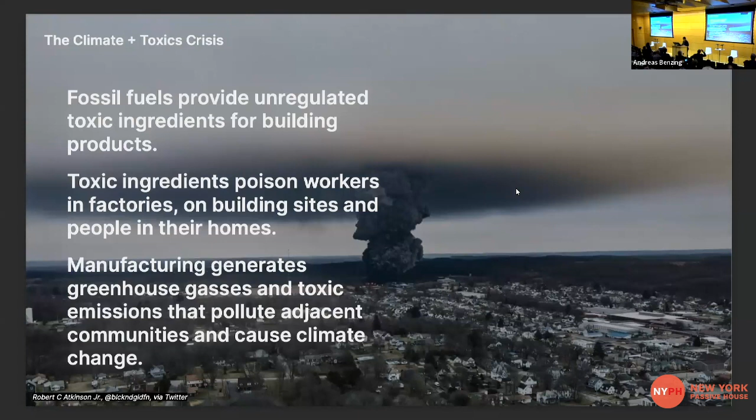Fossil fuel refining products produce both the toxic ingredients for the products we use and the toxic emissions that pollute our planet and ourselves in all our buildings. We know that manufacturing generates greenhouse gases and pollution. We need to change the way we use fossil fuels to make a truly just transition for everyone to green economies.

At HML, we address the toxics and climate issue by charting pathways to make it easier for all of us to design and build healthy buildings today, and to accelerate that rate of change.

Our work begins with common building materials that often contain toxic chemicals. Many people are unaware of this issue. When we specify products as architects and designers, those choices can include chemicals like flame retardants, fluorinated stain treatments, formaldehyde, a range of plastics, and other problematic chemicals. As these chemicals break down, nothing is stable, and chemicals can be released and harm those living in the space.

We do know what's inside food products because ingredients are regulated by the Food and Drug Administration, and many people look at those ingredients, particularly if they eat Doritos. We assume materials and products we buy are regulated, but surprisingly there are no regulations for building products. Many people don't know to ask for product ingredients. Surprising, food and buildings are very similar.

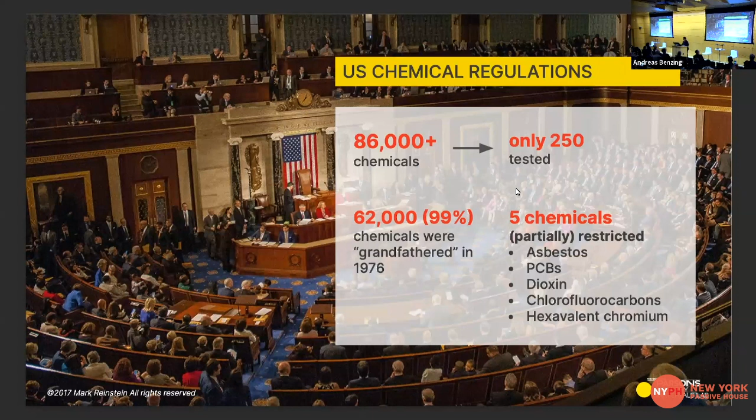We assume that materials in the products we buy have been tested for safety, but most, if not almost all, the chemicals commonly used in building and consumer products in the United States are not regulated for their impact on human health or the environment. Only 250 of the more than 86,000 chemicals currently in use are tested, and only 5 of those, which we all recognize as problematic, have been partially restricted by law. These chemicals have a profound and negative impact on both human health and the planet. The materials used in buildings, cities, objects, and furniture are releasing toxic particles that are absorbed into all our bodies. We are truly, if we are what we eat, we are where we live.

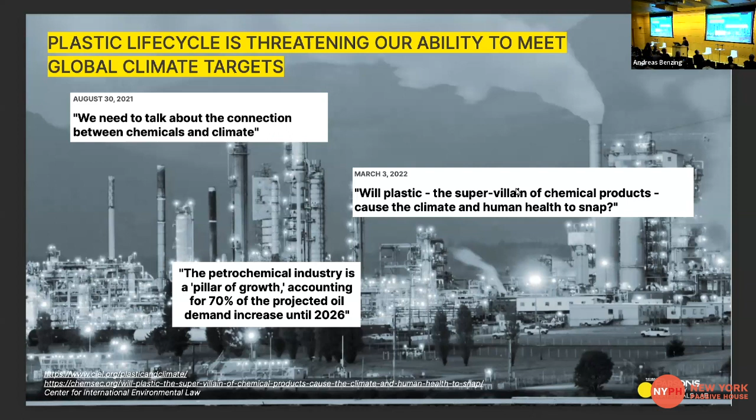Research shows that the petrochemicals used to make building materials have a high carbon footprint. Fossil fuels are used to power the factories, to make the ingredients, and to transport the products and raw materials.

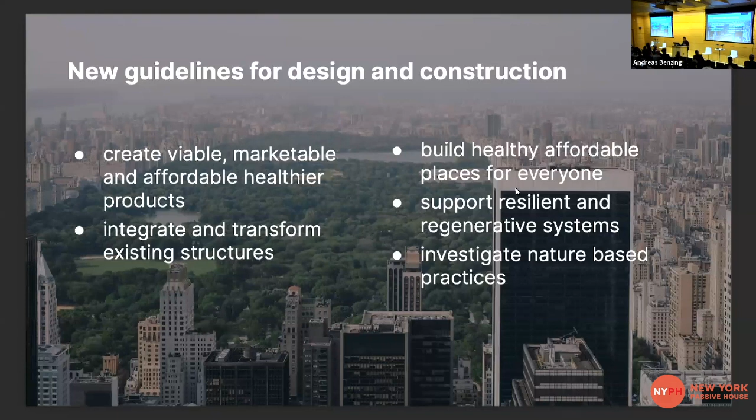We need a new set of guidelines, policies, and regulations to help us make transitions to building better. We can build for a new future if we create viable, marketable products that are affordable, if we integrate and transform existing structures, if we build healthy, affordable places for everyone, if we support resilient and regenerative systems, and if we design with new nature-based practices.

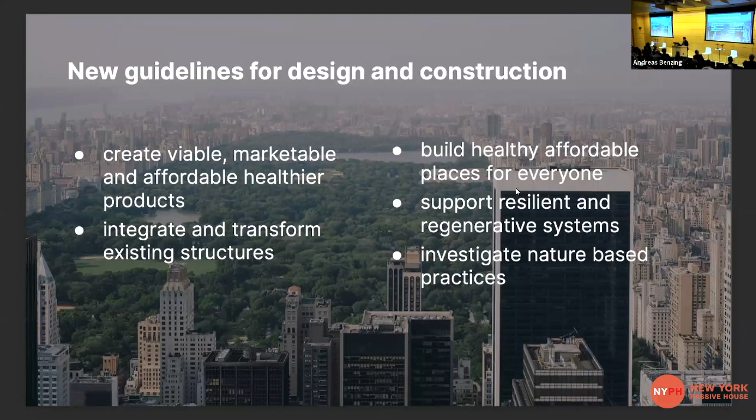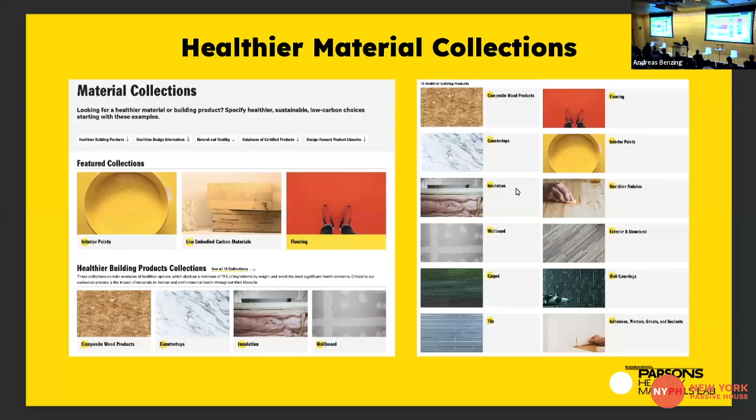Our theory of change is to empower and enable architects and designers to make change today. We offer a wide range of resources to make this possible, including a range of educational programming. On HML's website, we provide free access to carefully vetted collections of healthier materials and offer physical material examples in our New York City library on campus, and we share material health information widely. If you're interested, sign up to learn more about our public events in person and online.

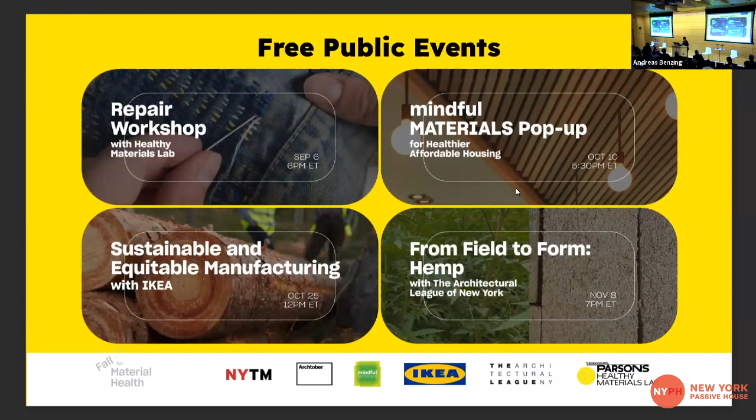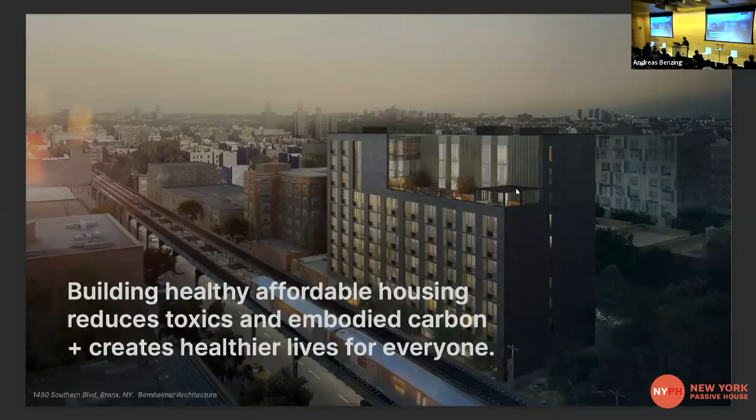As you move through the presentations this afternoon, you'll see a whole range of responses to these questions that I've just posed and that David has highlighted. We ask that you remember that toxic pollution in all its forms is a persistent problem. It's evident that there's a clear relationship between toxic chemicals and embodied carbon content. No one would want to design a high-performance, energy-efficient building that was built with toxic materials. It is possible to build better and reduce both toxic and carbon emissions. This is better for all of us and better for the planet. I'm looking forward to this afternoon's presentations, and I'm inspired by the work of this community.

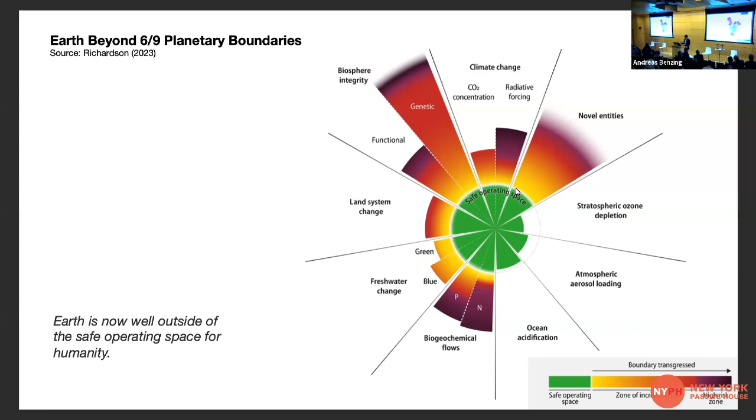Climate Week is traditionally also a moment where many reports are being published. I haven't had the chance to go through most of them yet. This is just one of them, one of these new reports that came out three days ago, about the fact that we're now measuring all nine of the planetary boundaries, and we're actually exceeding six of these nine. So it's a dire moment in time, summarized in this paper by: Earth is now well outside of the safe operating space for humanity.

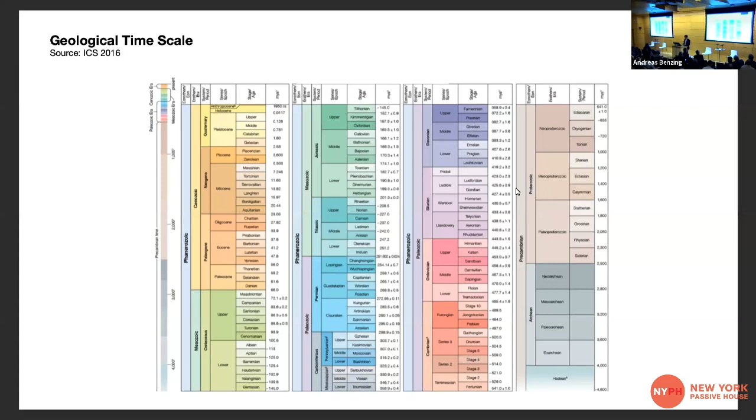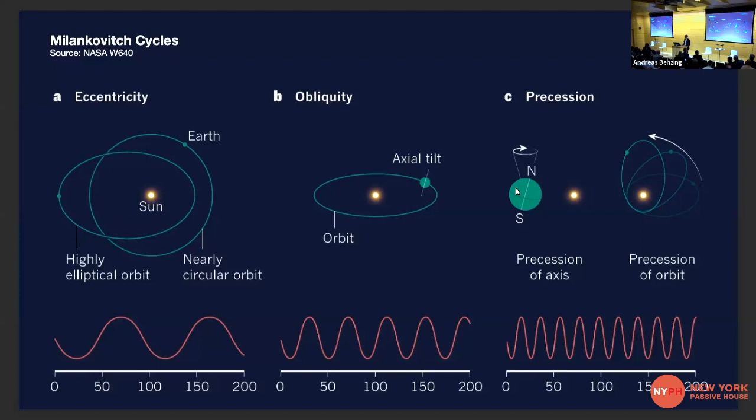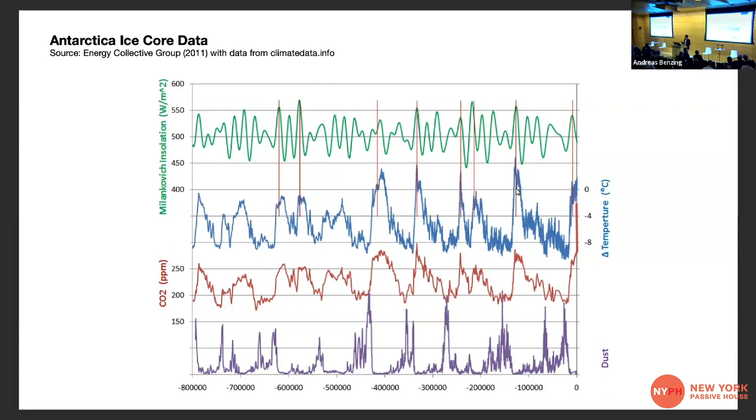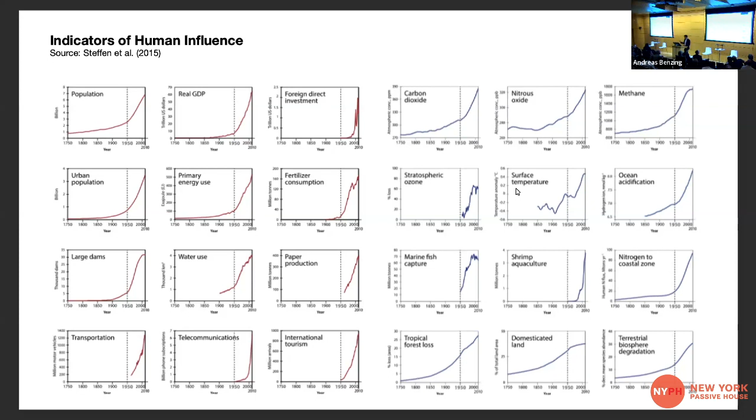Now come the last 70 years, where we see indicators of human influence, and these are all eerily similar. They all start picking up in the 1950s, they all go exponentially up. Some fortunately have slowed down, some are still on the rise, but it doesn't really matter what we're looking at: dam construction, water use, GDP growth, population growth - all of these graphs are similar. This is the reason why we're now talking about the Anthropocene, where human influence took over planetary scales. I think it's important for us to understand that scale.

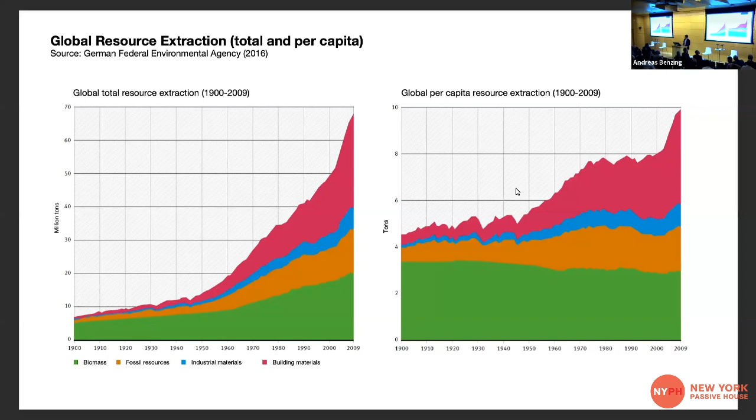Then the question is, what does all of that have to do with the built environment? So here are two more of these graphs that again look the same: in the '50s, we start rising exponentially. Here you can see, in magenta, material - building material extraction on the left, globally, total extraction, and on the right per capita, so that we can't say, well, there are more people on the planet, of course we need more materials. No - every one of us is needing more material, and we're all part of this that's happening.

And so if we sum that all up, estimates say that the built environment, if you take a building from the very beginning till the very end of the building's lifetime, is responsible for more than 50% of materials taken out of the Earth's crust, more than 40% of solid waste that is being produced, and about 40% of the carbon emissions that are being emitted.

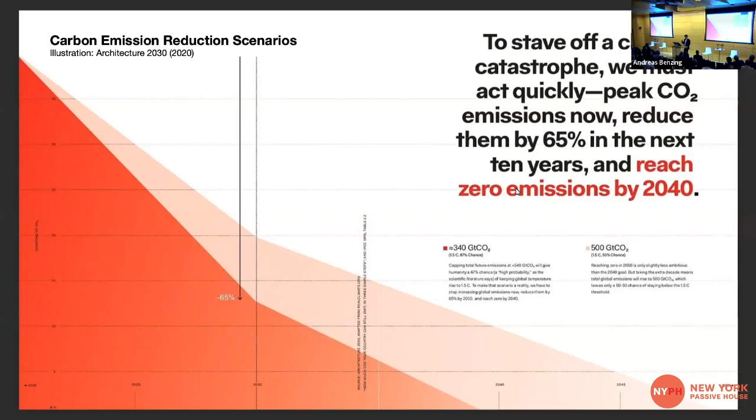The unfortunate news is that, at least in Germany, we have just announced that this year, because of that record summer we've had, we actually reached the 1.5 degree mark already. This hasn't really been discussed in US news yet, and I don't know where we are exactly, but we're damn close to this. So we need rapid action.

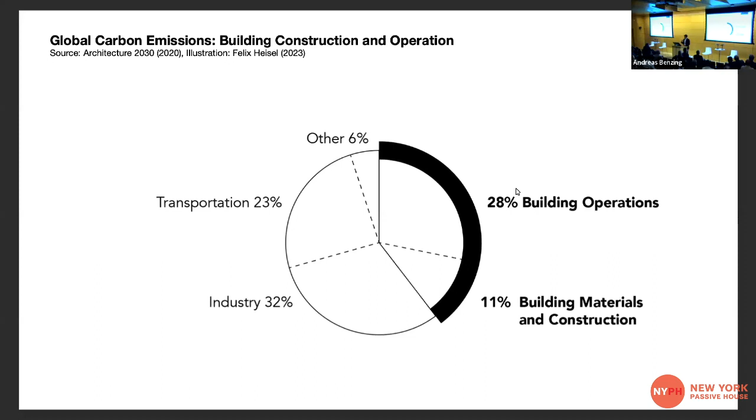And this is where it gets interesting in terms of the relationship between embodied and operational carbon. So what you see here is this 39% that I'm sure all of you have seen before. This is a global number representing the relationship between emissions from building operation and construction of buildings. But if you take one building, construct it today, and think about the timeline—these 7 years or 5 years I just mentioned—these ratios shift dramatically.

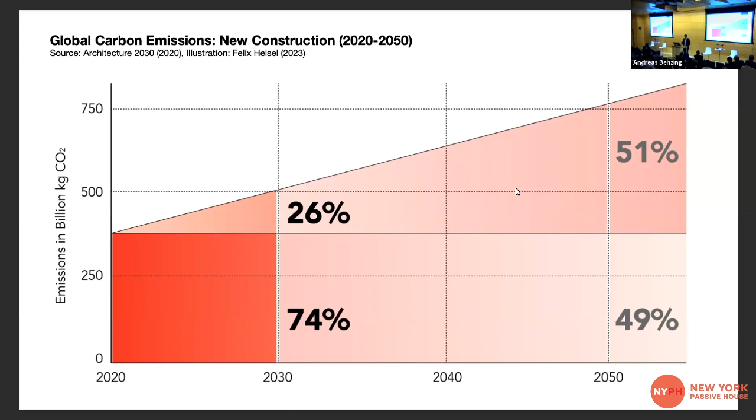Because, of course, embodied carbon emissions are emitted on day one of a building's opening, right? All these emissions have been emitted, versus operational carbon emissions which are emitted little by little over the next 50 years in this scenario. And so if we only have 7 years, then suddenly the way we build becomes really interesting as a starting point for the conversation.

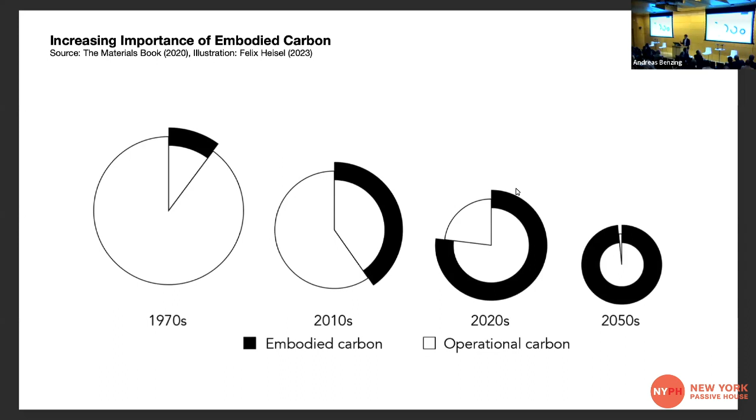Additionally to that, and you're all experts of that, our buildings are getting better and better in terms of the percentage between embodied carbon and operational carbon. So the more passive a house, the more important the way we build it.

And then the question is, what do we do with that now, right? So we know that different materials have different embodied carbon emissions attached to them, but maybe more important is that strategy...

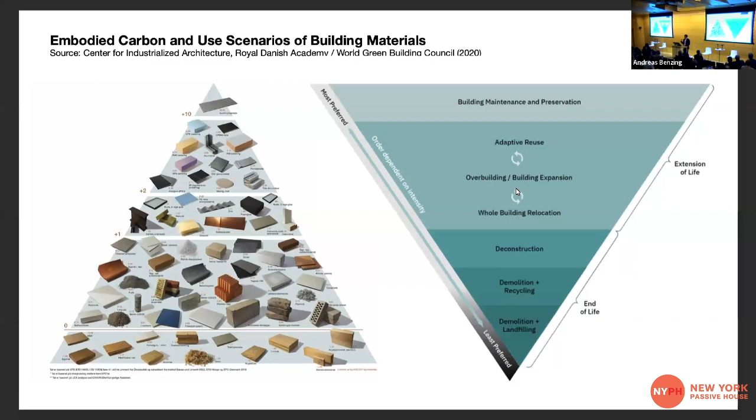...pyramid on the right, where a material that is already here, right? And we start reusing that as a strategy—that has the least emissions attached to it, because these emissions have already been emitted and we're starting to preserve those. And so adaptive reuse, building preservation, reuse, and deconstruction are strategies that we're really interested in.

And so the Circular Construction Lab really focuses on this shift from a linear economy to a circular economy, where we shift from take, make, throw to take, make, repeat, with two different focus points.

One is looking into the past, trying to understand the built environment as a resource for future construction, trying to figure out what we need to know about the built environment to actually activate it as a resource, because we usually don't even know what is in our buildings.

What kind of strategies of extraction can we implement? What kind of economic business models are attached to that? What kind of social constructs are attached to that?

And on the other hand, looking forward, it's the question: how do we now, knowing all of this, design differently so that buildings built today don't run into the same problems in 30, 50, 70, hopefully 500 years down the road when they get to the end of their use time?

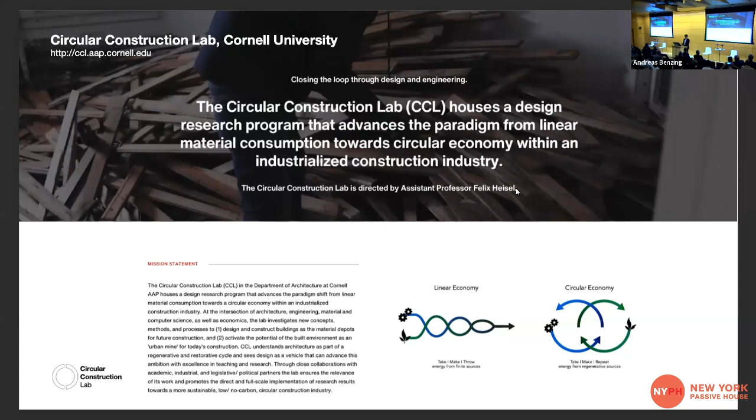And just because sometimes we're asked, so what is a circular economy? The definition we're using is one published by the Ellen MacArthur Foundation and repeatedly overhauled over the last years. A circular economy is one that aims to eliminate waste and pollution, circulate products and materials at the highest utility and value, and regenerate nature.

So the projects that I want to show address these two directions that I just mentioned. I'm going to start with the question: what do we do with the built environment as it is, and how can we see that as a resource?

This is a pavilion that we built for the Ministry of Environment in Germany in 2019. It's called the Mehrwert Pavilion, and it's a structure that is entirely built of secondary materials, so there's no virgin resources in this construction. I'm pointing it out mainly because of the story with the reuse of steel, but we've had 4 different material families in this building.

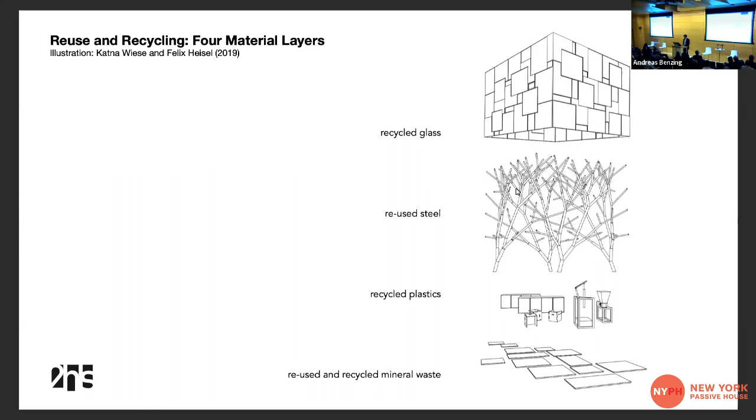The facade is basically only recycled glass. Then we have all the furniture that is recycled plastics, actually recycled household plastics in this case. And then we have reused and recycled mineral waste for all the flooring and the foundation.

This is an image of these foundations. That white snow-like material is ceramic waste that otherwise would have been landfilled, and we found a way to define the sieve curve through milling it into very different particle sizes to form, without any adhesive, a layer that sustains 6 million visitors over 3-4 months. We kept this material out of the landfill, we didn't add anything to it, and we created a wonderful aesthetic because it sparkles in the sun like snow.

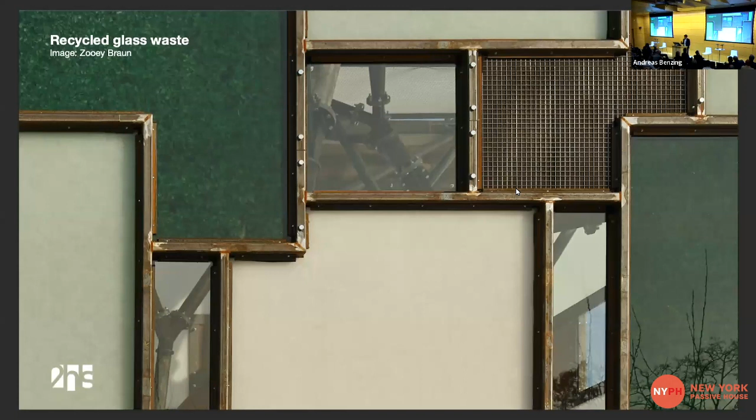It was incredibly beautiful. The facade uses secondary glass resources, but brought into a ceramic product, a glass ceramic product. The interesting thing is that it keeps the aesthetic of the shard, right? We're not melting this material all the way to the melting point, but it's just soft enough to create a new product out of it. So we're using less energy, but we're also keeping that shard, which gives an aesthetic you could never generate from a virgin resource, and really talks about the history of the material.

But what I wanted to mention most about this project is the reuse of steel. We can always recycle steel, but what we wanted to do here is reuse it directly.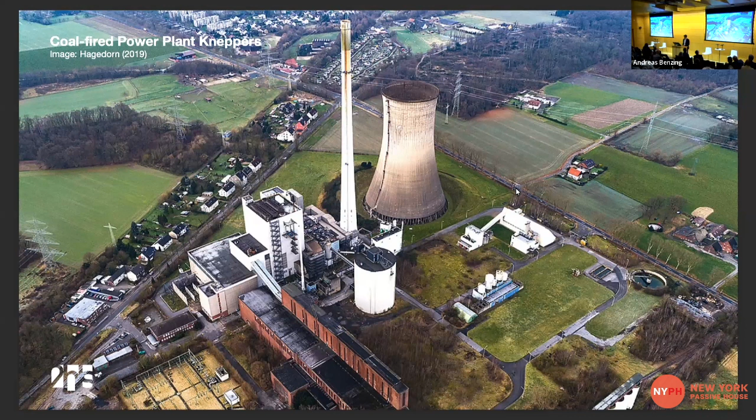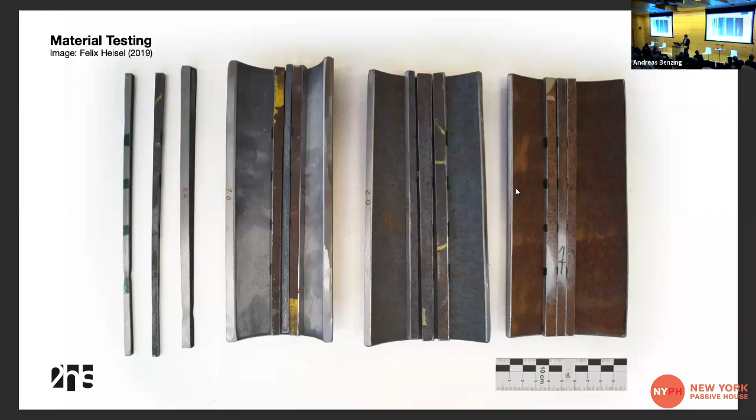But we were able to take the steel we needed for this building out of this power plant before they blew it up. The problem was we had no idea what steel we got, because there was no documentation, it was not stamped. So the office needed to go out and do 5 tests at a large sample size: chemical composition, weldability, tensile test, compression test, to figure out that, yes, this is standard structural steel. With that knowledge and that stamp, we were then able to get a building permit for this.

The reason why this is important, I think we'll get back to at a later stage of this talk. The documentation of our built environment is an increasingly important part in the transition to the circular economy.

The point I wanted to make with this image is that, of course, there's a design conversation here as well, because we started with a building stock that is non-uniform, that would have never resulted in an image like this if we had started with standard steel from, I don't know, a department store. So the dimensions, the sizes, the condition, the marks, the historic marks, determined the design process of this pavilion.

Now, this is one example from Germany. If we want to scale this and translate that into a US context, this next project is a deconstruction project in Ithaca, New York.

Here we had a developer that got a permit to take down 11 residential houses from 1906. You see that process: the excavator driving through those houses. Essentially, it takes 2 days to take down that house. Everything is driven over, made as small as possible, one stream for recycling, everything put into a dumpster and shipped off to the landfill.

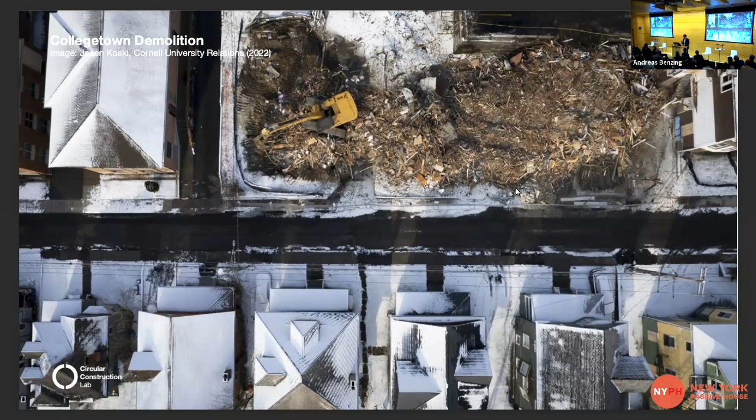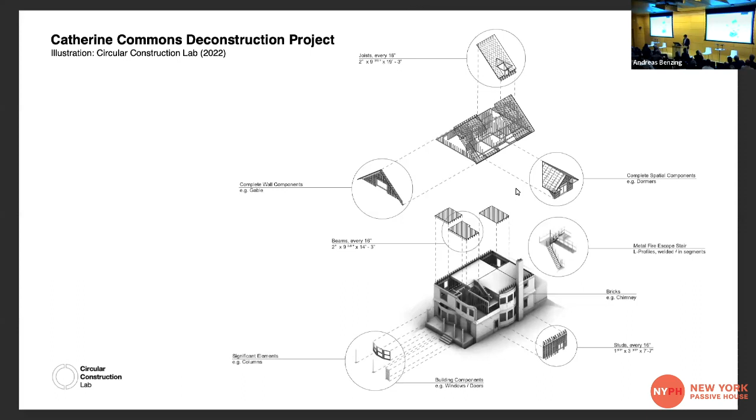Which was a challenge, because a deconstruction is more expensive and more time-intensive than a demolition. So what we needed to do was develop a new process of deconstruction, which we're calling panelized deconstruction. We worked together with the Building Deconstruction Institute out of Seattle.

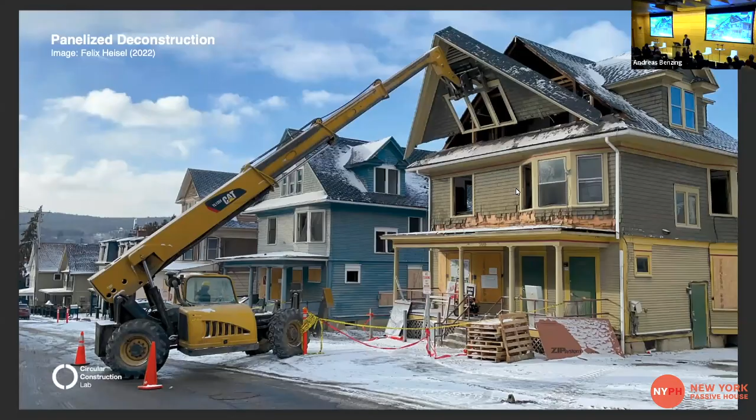Essentially the idea is to cut a building into pieces that are as large as possible so that they still fit on a flatbed truck, to be shipped away from the site as quickly as possible, and to do the time-intensive deconstruction of these units or components in a controlled environment in a warehouse at a different location, which meant that in this case, after 4.5 days, we had the site cleared.

It was a 3-story, 13-bedroom residential unit, which took us 4.5 days to deconstruct. We had a very happy client because we were out in time.

And we had a large amount of data that we've been sieving through for a year now, to create a narrative about deconstruction versus demolition. So why are we interested in this?

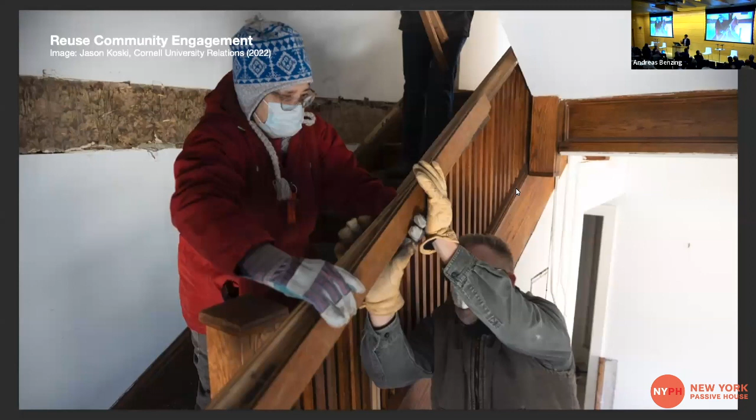One part is that it's an insanely positive community engagement tool. We had the acting mayor of Ithaca carrying out floorboards of these houses to rescue wood from the demolition, which was a really important way to start a political conversation about what we're doing in the built environment.

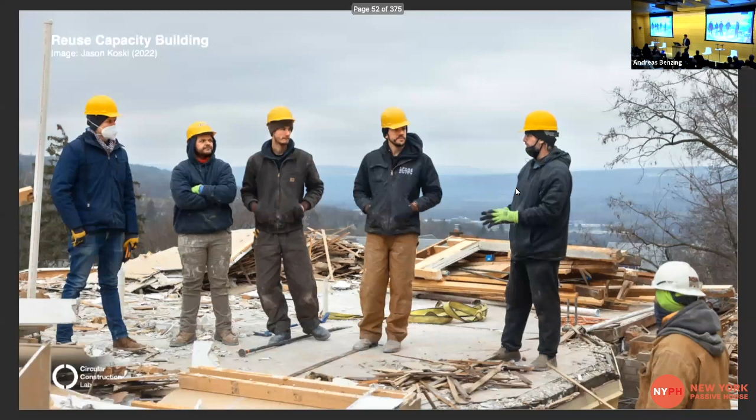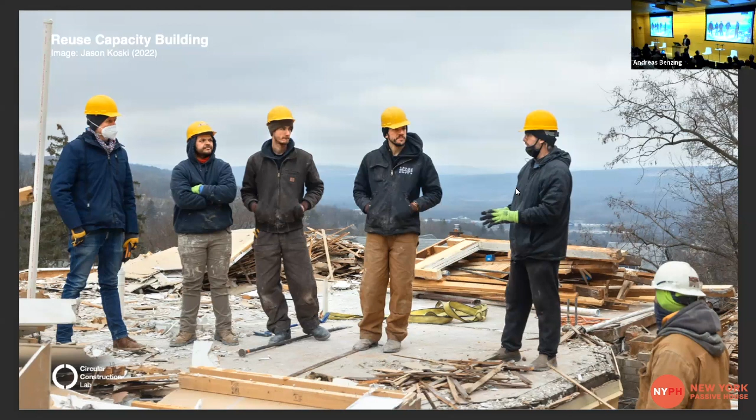We used it as a capacity building program with local trades. In this case, you see Trade Design Build, one of our main contractors, getting training by the Deconstruction Institute to pass this knowledge into the industry.

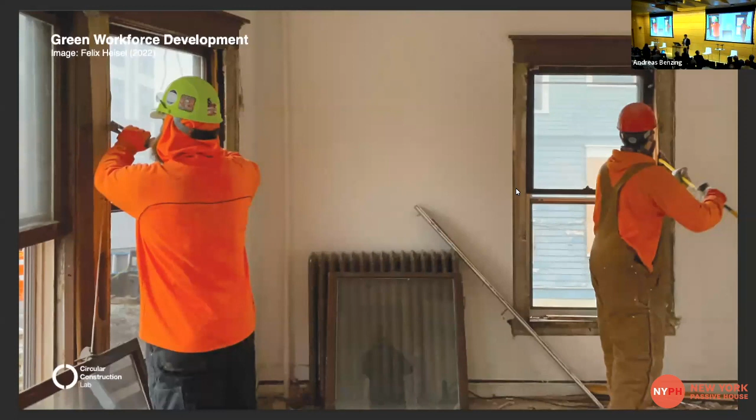We've worked together with the apprenticeship program of the local union to bring apprentices into this program and start training them in deconstruction. And we're bringing in students.

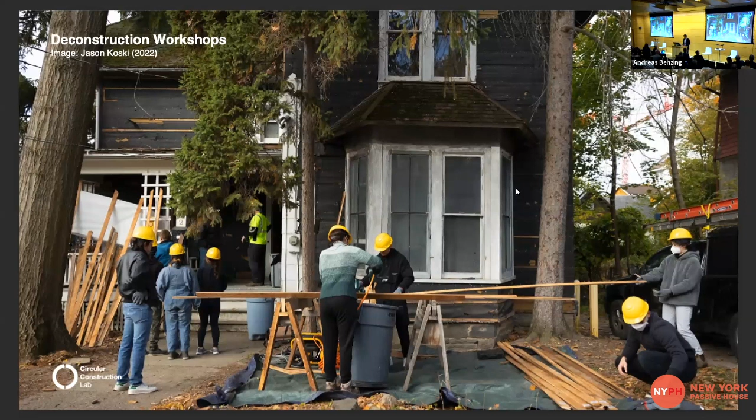This is my design studio class working on denailing and deconstructing timber. It's a really interesting exercise for an architecture student to take down a building, and especially a detail that wasn't meant to be taken apart, because you spend two hours trying to save this timber beam.

And in the end, it might still snap because that last nail just didn't give way, and there's a lot of frustration involved. But the benefit is that when you go back to your drafting table at the end, you're never going to draw a detail like that you tried to deconstruct. You're going to draw something that is reversible, designed for disassembly, because you've experienced with your own hands the frustration of taking something apart that isn't meant to be taken apart.

A bit more scientific is a real analysis of these two case studies. And now we're seeing in the local environment in Ithaca that we're not only much better for the environment, but we're also cost competitive.

Because the revenue that we're getting from the resale of these materials that we took out of the building actually offsets the additional labor costs that we had for deconstructing that building.

And this is really good news, because if we're cost competitive, we can shift the conversation to the things that actually matter: the embodied carbon that we're taking out of the building, the additional labor that we're creating, the green workforce development, the new jobs, the cultural heritage that's being preserved through deconstruction.

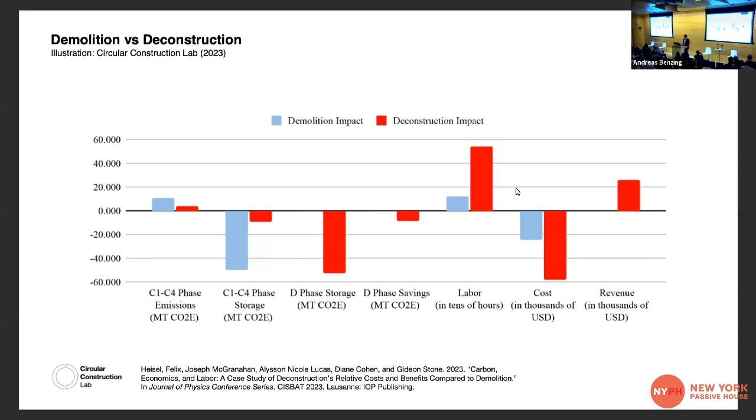The other thing I mentioned at the beginning is we use this project as a starting point to understand what is in a building. What I'm showing here is what we're calling a salvage and deconstruction survey toolkit, which is essentially a set of...

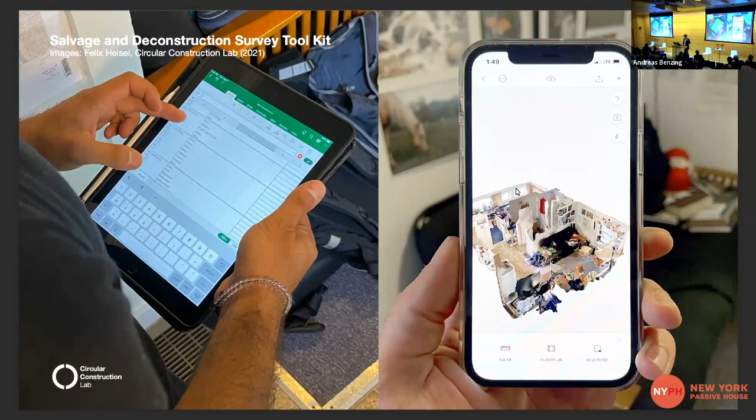Tools that we're developing for scanning the built environment. On the right side, you see a LiDAR scan of a building. On the left side, you see an Excel survey that we've started to create, but we can link these two.

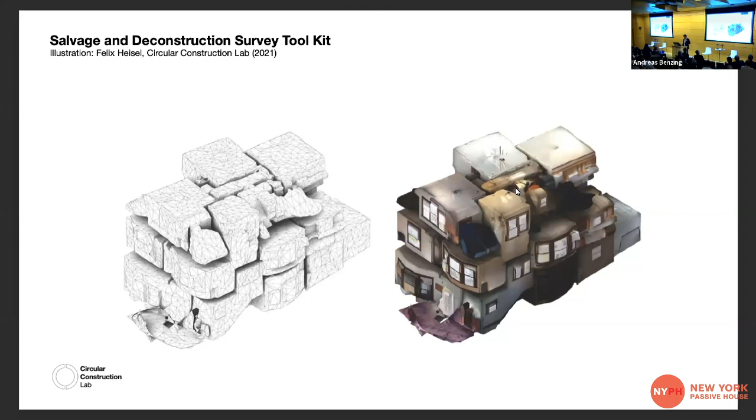Of course that LiDAR scan has the benefit that it has embedded textures and photographs. So when you connect these two components, you get a rather quick estimate of the material contents of a building.

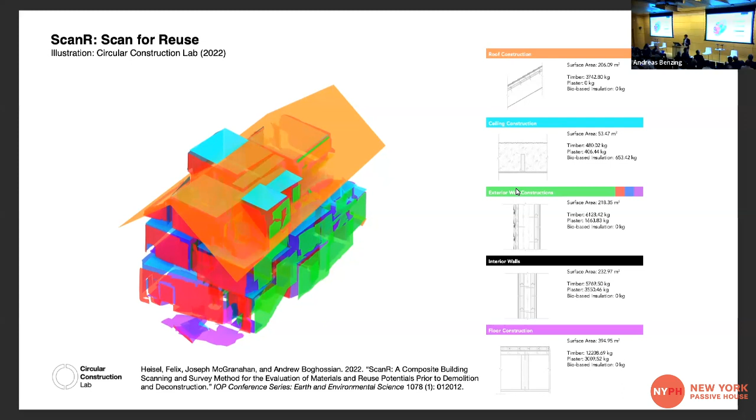It took us two hours to scan this house and a couple hours post-processing, but you then know, as a ballpark figure, what is in the building, what kind of details to expect. We're using construction archetypes linked to these surfaces—not to say you want to sell exactly 3,742 kilograms of timber, but to start a meaningful conversation with a deconstruction expert, with policy on getting a deconstruction permit. All of these numbers help have a more informed conversation with local stakeholders about a specific building and the benefits of saving it.

Here you can see a set of these construction archetypes that were developed. This is of course a local database, and we're really interested in expanding it so that this tool is more accurate in different locations. But this is an ongoing research project.

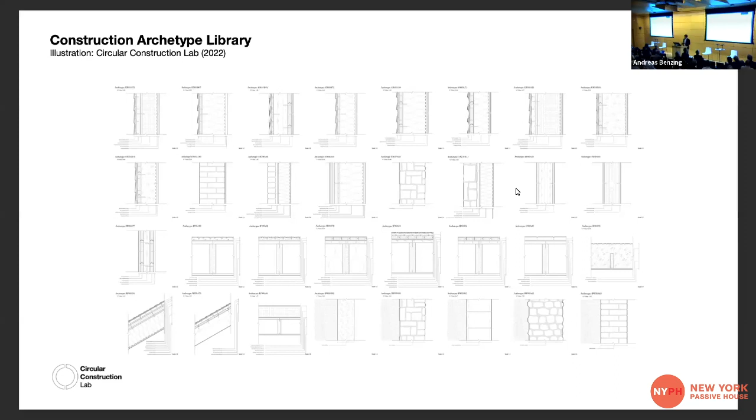Here you can see a quick summary of what is possible to get out of this scan very quickly. One is, of course, an embodied carbon number. You get surface areas, you get different types of material information.

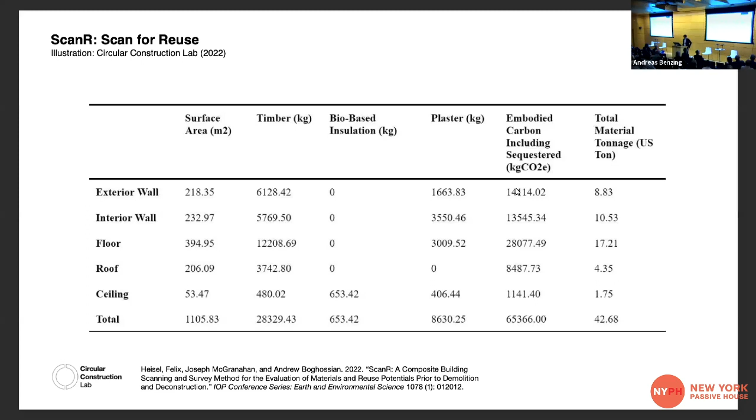We can do this on the building level, but I think it gets really interesting when you get this data on an urban scale, because while we can take materials out of one building to build one more building, it's unlikely that this will ever be a direct move. It's more likely that we'll take materials out of one building and bring that into 10 buildings, and take other 10 buildings and bring material into one. So we're talking about an urban marketplace, an urban stock flow model. And we need a much better understanding of that so-called urban mine.

Ithaca is a fantastic case study for us, because in 2019 the Ithaca Common Council approved what is called the Ithaca Green New Deal, a plan to decarbonize the entire city—all 6,000 buildings—by 2030. It's an incredibly ambitious program, and it's been in the news left and right and everywhere. The main component is complete electrification of the built environment, so every house will be electrified. There will be no fossil fuels in Ithaca by 2030.

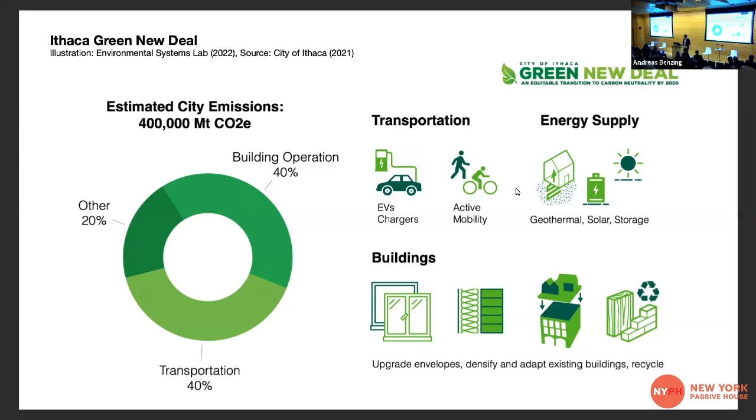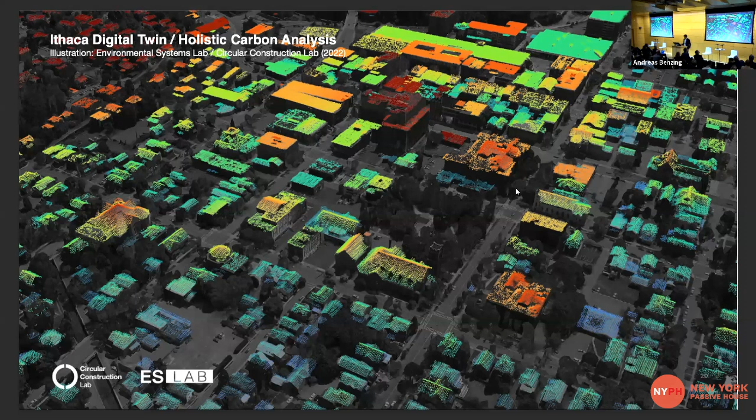But with it comes an interesting conversation about what that means on the embodied carbon side, and that's where we want to be involved. Our solution is the construction of a digital twin of the entire city to then do scenario simulations and trade-off simulations of different strategies in this decarbonization effort—really thinking decarbonization holistically, embodied and operational carbon emissions together. This is a project we're working on together with the Environmental Systems Lab and Professor Timur Dogan at Cornell, but it also has NYSERDA, Siemens, and Avangrid as partners, to really understand these urban scale questions using Ithaca as a case study.

I'm not going to go into all the details of that model, but it's essentially fed by aerial LiDAR data that's publicly available, GIS data and footprint data that's publicly available, and tax information that's publicly available. We use all of this to generate a clean geometry, and we map our construction archetypes to this geometry to generate a model that can do both circularity analysis and EnergyPlus simulation for all 6,000 buildings in Ithaca.

So naturally, we're starting with simple information like what kind of housing types do we have, what kind of heating systems do we have, right? This is something we can map very quickly.

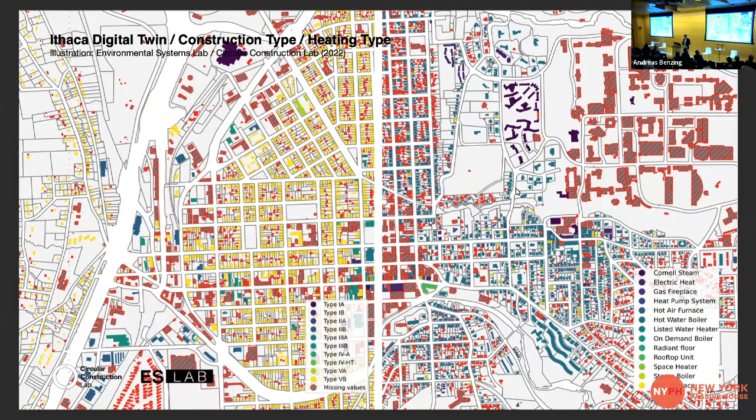When we combine that with, for example, a rooftop PV potential analysis of all these geometries, we're suddenly talking about an urban scale conversation. Can we fulfill all the load demand from electrification of these buildings with local PV potential, based on a geometry analysis of the city? The interesting thing is that if we bring it down through electrification and a meaningful retrofit over the year, we can actually do that on an urban scale. Naturally, in January we have a problem, and in July we have a bit more energy than we need. But as a year budget, on average, we can cover the electricity demand through local generation.

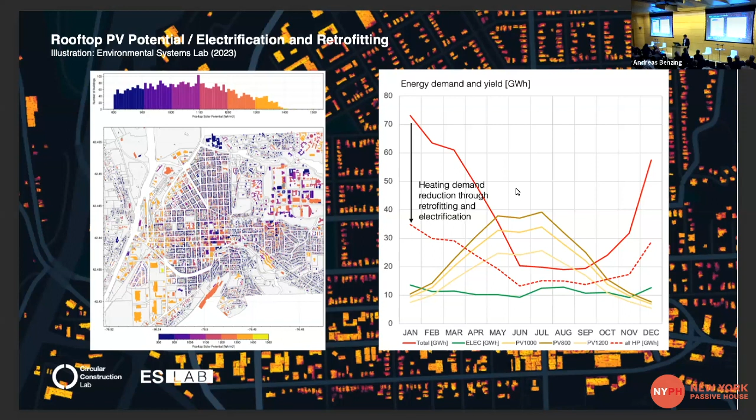Our contribution is really on the detailed understanding of the built environment in terms of materiality. This is a summary of the urban material cadastre of Ithaca - how much timber is in these buildings, which buildings have which intensity of materials, where is what kind of embodied carbon in there.

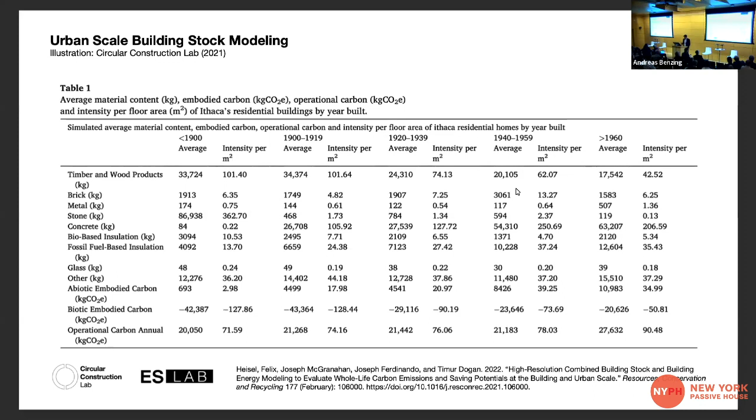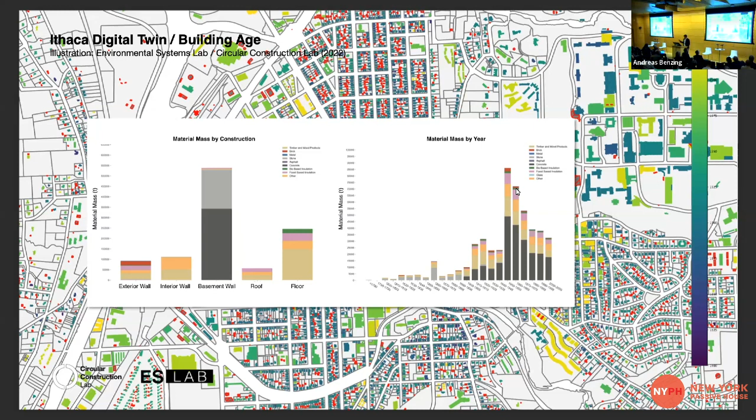When we combine this - these slides were generated yesterday because we finally got it to work just in time to show you - it's an understanding of the circularity of these constructions. We did an EnergyPlus simulation for all these materials and buildings, but now we also did a material passport calculation and a circularity calculation for 6,000 buildings. So now we know not just which materials are where, but what kind of circularity is attached to these buildings.

Unfortunately the scale is hard to read, but we're ranging between 0 and 70% in these buildings. The yellow buildings are extremely circular. The bluish magenta ones are less circular, which doesn't necessarily surprise us, knowing the stock a little bit. This has to do with age and material use in these buildings.

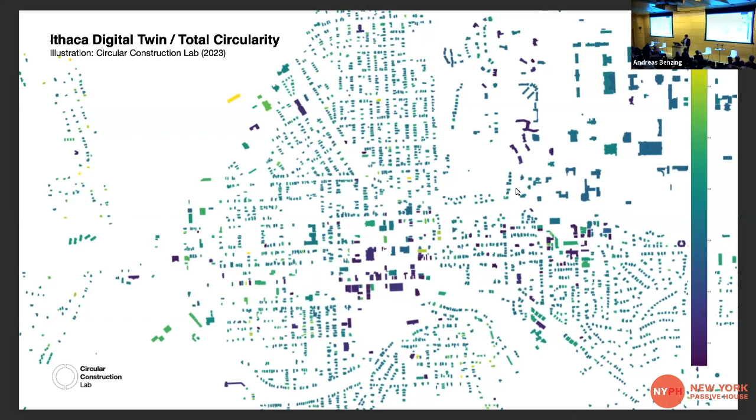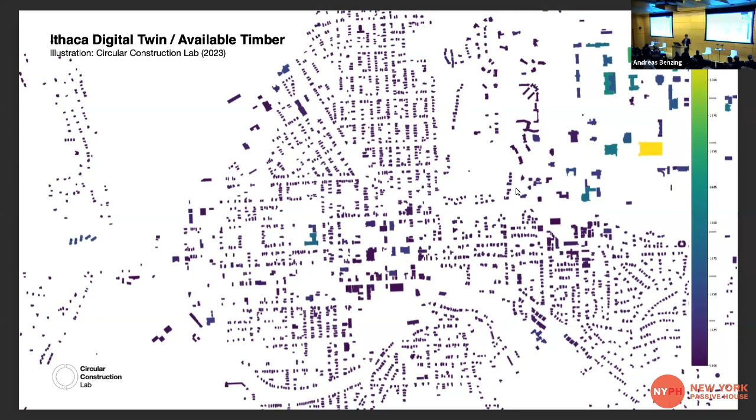The interesting thing is, if you compare these numbers with an understanding of what materials are in these buildings and how they're constructed - in this case we're seeing only timber and the amount of timber in these buildings - if a building comes to market or asks for a demo permit, you can look up: this building has a lot of timber, and it's also easy to get. Or in this case, there's a lot of material here, but it's really hard to get. So we have a much more informed conversation on the urban scale about circularity and materials.

None of this works without policy. So in 2020, we founded a stakeholder network called CROWD, short for Circularity, Reuse, and Zero Waste Development. It's a local, growing stakeholder network for New York State.

We had really interesting partners join recently. For example, the Preservation Association of Central New York is one of the more recent members, but we also have the City of Ithaca, and now the City of Troy, join CROWD.

The agency we're creating with this is really to have a New York State partner that talks about policy in the built environment regarding circularity and deconstruction, and specifically reuse. We've created a platform that's now at the point where we talk to the New York State Assembly, talk to certain senators, and we're talking to 7 different cities and communities about policy changes towards reuse. The outcomes of all of this are publicly available. The most recent publication is a local government policy guide to alternatives to demolition through deconstruction and building material reuse, available on cr0wd.org - crowd with a zero, not an O.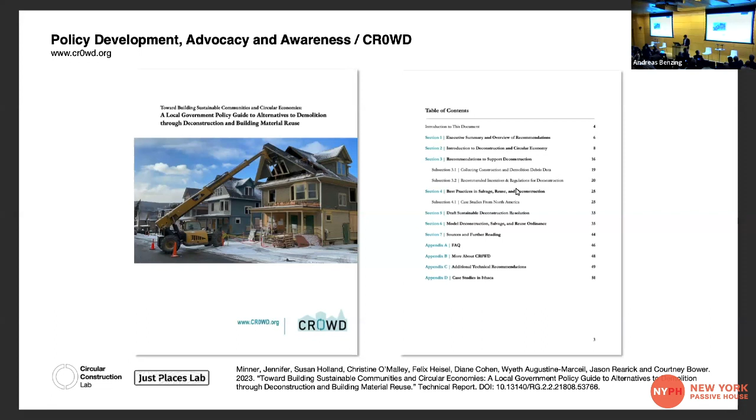Next to policy, we also need to talk about code. One thing with timber, for example, is that at least in New York State you can't just reclaim timber for a structural application - it's not allowed. So we've partnered with SBP out of New York, and are in the midst of a test series that looks at reclaimed timber and the steps we need to update our code to allow structural timber reuse.

That has to do with questions like: how do we even find out what timber that is? How do we classify that timber? What information do we need for a meaningful structural engineering design? And how does that comply with code, and where do we need to make changes to the code?

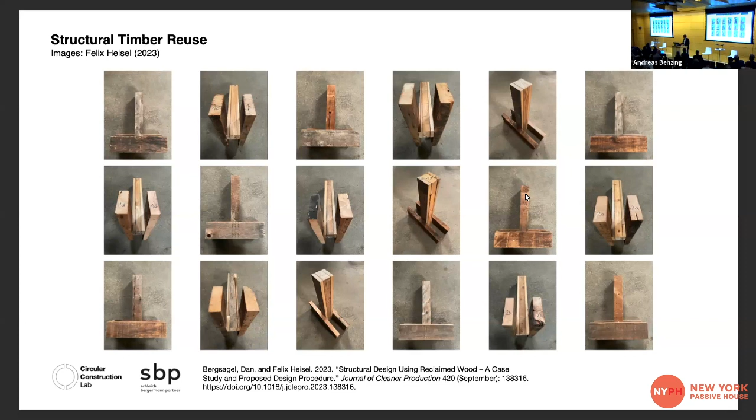The other stream that we're looking at is design for disassembly. So how do we design differently from now on?

The example I want to show is the Urban Mining and Recycling Unit, a building we constructed in Switzerland with the office of Werner Sobek. The building we're looking at is the part in the middle of the screen with the copper frame. It's a unit within the so-called NEST, a shelf-like structure surrounding the Urban Mining Recycling Unit, which is a testing facility of the materials testing laboratories in Switzerland.

They came to us based on a book we published in 2014, Building from Waste, where the question was: it's nice that you're writing about resources out of waste academically, but can you actually prove it? Can you use these materials in the built environment? So we had our work cut out, and it took 4 years to make it possible. The claim was that we built a building where all materials going into it can return to their cycles at 100%, a very academic goal for a built project, maybe only possible in this specific setting where the client gave us the time and money to figure out how this is possible.

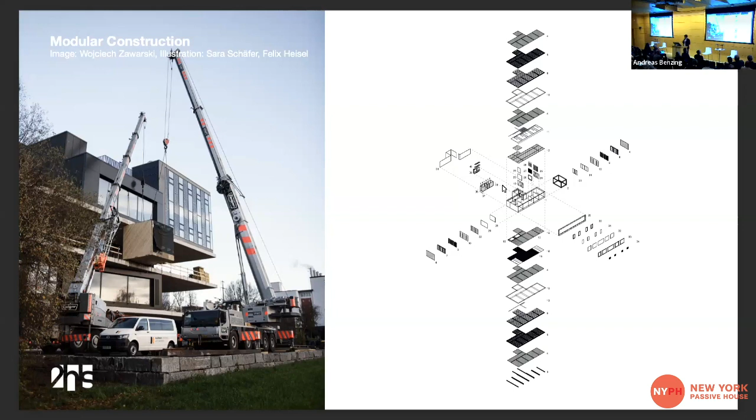Design for disassembly really is the guiding principle, which led in some parts to modular construction. We delivered 7 units that make up the whole unit in one day, rolling them into the building and only pinning them down on rail foundations. The idea is that at end of life, we just roll them back out, bring them to the factory, and disassemble them. Disassembly was always the guiding principle, as you can see in the drawing on the right, making sure every connection is known and every material is separated into different life cycles in different locations.

I want to show a couple of examples. How am I doing on time here?

One question we asked ourselves is, can you build a brick wall without mortar? Mortar is usually the issue when you want to directly reuse the brick. So this is our answer: we developed a new brick with a tongue and groove system and a post-tensioning cable system, creating a structurally stable wall by tensioning these rods. If you want to reuse the brick, you unscrew the steel connection, take out the brick, and you can use it somewhere else, reshuffle the wall, and do all sorts of things with it.

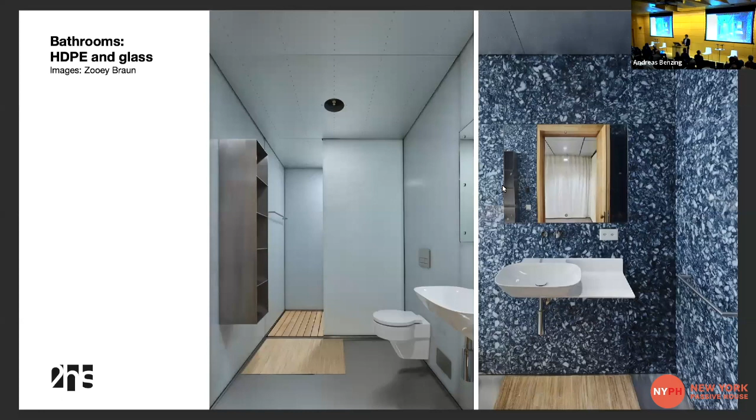The other question was, how can we build without any adhesives? There's not a single type of adhesive in the building—no silicone, no glues. It becomes especially interesting in wet rooms like bathrooms or restrooms. The example here shows the two bathrooms the unit has, where we opted for the largest format of glass or HDPE panels pressed into dry gasket sealants. If we wanted to take these out, it's just two screw connections and you can remove the whole panel—no silicone left on it, nothing to scrape. These are basically as delivered from the manufacturer, and you can take them out and reuse them somewhere else. The building has been standing since 2018 without any water leakage or damage, so it's possible to build without adhesives.

Another question we ran into, to show the level of detail needed to get these last couple of percentage points out of a building, is that we didn't find a single faucet on the market that fulfilled our goal of recyclability or reusability, because they're usually 3 different materials pressure-fit together—copper pipe in the middle, some movable parts out of plastic, some surface material around it—and they're not meant for disassembly.

And so usually these things end up in the landfill. And at the end, we decided we need to partner with someone and actually develop our own faucets. So the faucets in this unit are 3D printed stainless steel, where all parts—the pipe, the movable element, and the faucet itself—are printed in one go and in one material. So it's a monomaterial solution.

And if you can't reuse it for the tenth time anymore, which is, of course, the hope that you first do that, then you can reprint something else out of that material without any loss.

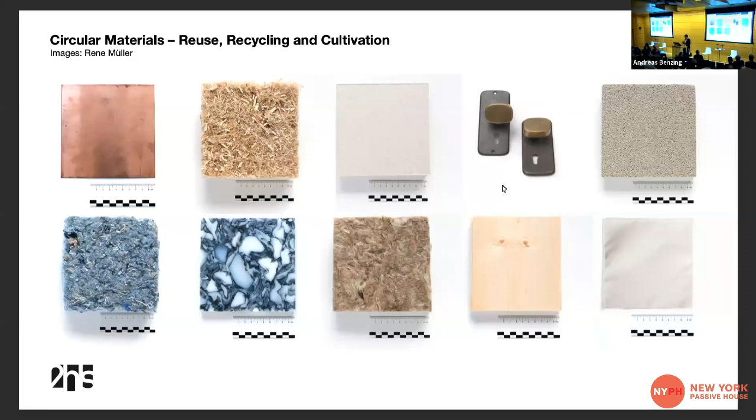Documentation is key. So that unit has its own material library with all the 24 materials that were used, available online, and also as a physical sample in the unit to sort of store that memory.

And in the end, we used the unit to create a material passport. At that time, Madaster was the leading agency that allowed us to do that. By now we have a couple more, but Madaster is still the leading agency in Europe, at least.

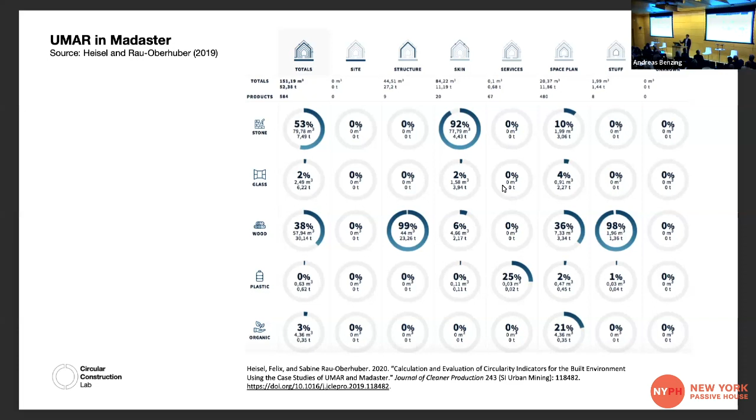Madaster is short for Material Cadastre. And it allows us to know which material is where in the building, how it's connected, what dimensions we have—so basically to foresee a future deconstruction, assuming we're not part of it, and how much information we need to pass on to someone else who wants to reuse these materials in their own buildings.

Going back, one more project from Ithaca with the same intention behind it. The wood that we took out of the deconstruction project shown earlier, part of this was used as a student project in a design-for-reuse studio. The idea was to build a structure on the art quad for the Cornell Biennial that is built entirely out of reused materials and designed for disassembly.

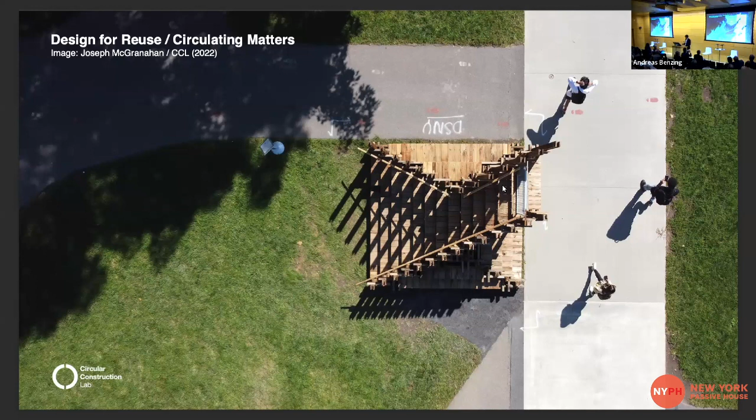So the result of that is called Circulating Matters. It's a curious little staircase that deals with multiple types of circulation—of materials, of humans—but it's large enough to need a building permit. So we needed to go through the whole process with the city of Ithaca on structural timber reuse and how we would need to permit that.

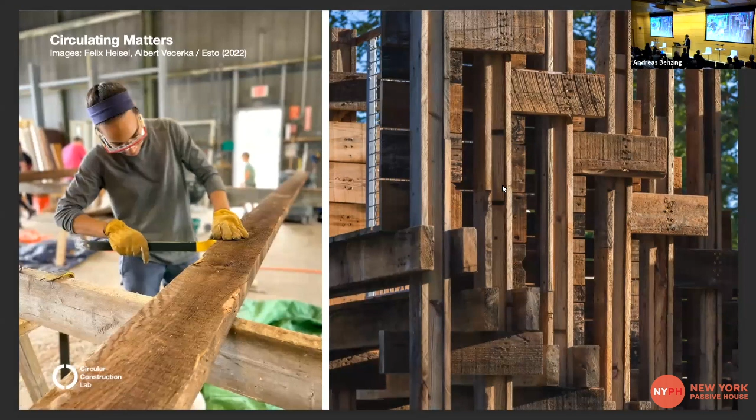So this is the first structural timber reuse in Ithaca that has a building permit, and it creates a bit of a precedent, but for us it more creates an understanding of the steps it takes for a process like that. And of course, it deals with many qualities, the aesthetics that come with material reuse.

The play between the old and the new, or the cut and the surfaces of the old. It teaches students how to deal with these materials. But more importantly, it asks a question similar to the Mehrwert Pavilion: how do we design with a non-standardized stock?

And so the details that we needed to develop had to deal with a tolerance of almost half an inch, because these materials were, of course, partially hand-cut or pre-industrialist cut—120 years old, these beams that we took out of this building.

So we couldn't really have a standard connection detail because the tolerances were way too big. And that's where, in the end, the design of these beams that shoot past each other started—because that way you only need one surface that is your defining dimension, and everything else is free and can play with that.

On the left side, you see a system to start material passporting and documenting these materials, making the connection between the physical and the digital to figure out where this was in the building before, where it is now, and where it can go next.

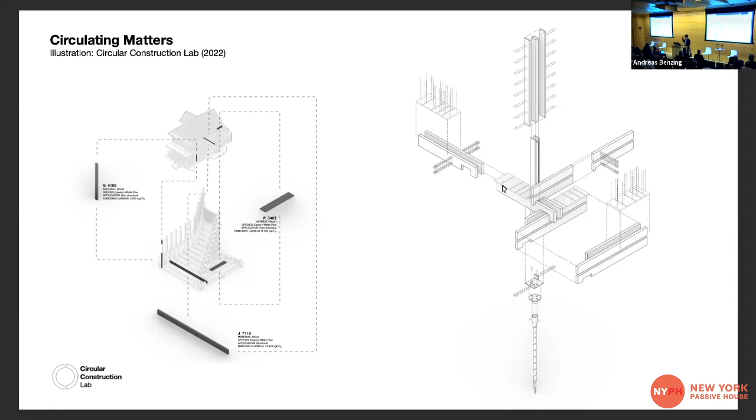And the next in this case is now an installation at Art Omi. We just moved this structure a month ago into the Architecture and Sculpture Park near Ghent, here in upstate New York. So if you ever have the chance to visit this fantastic park, maybe stop by this structure—it's going to be there for the next couple of years.

And it was a really interesting exercise, because for a new location, of course, we wanted to update the design. We wanted to reshuffle the design slightly to talk about the new site conditions, and the design for disassembly really allowed for that. We were able to reuse all of the materials.

I want to finish with a little software application we're working on, driven by an understanding derived from the Urban Mining and Recycling Unit. I showed you this material passport, and we were always annoyed with ourselves that we did that way too late. We first built the building, we designed the building, and in the end we had a nice BIM model. The BIM model gave us all the information needed to calculate the circularity of the material and publish this material report.

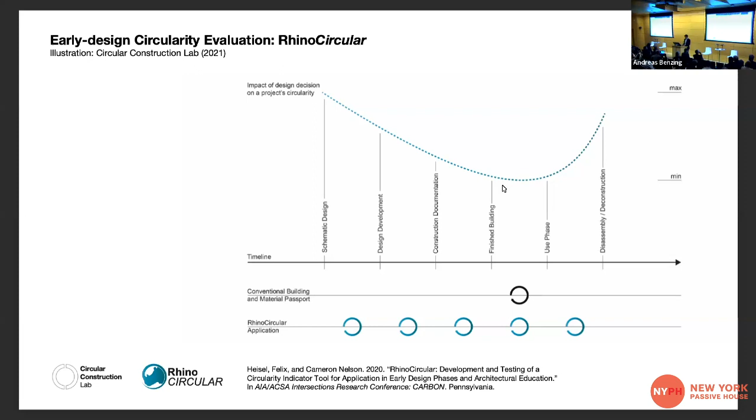Now that's too late if you want to use that information as a design input. So not only in academia but also in industry, we were trying to find a tool that allows circularity calculations at an early design stage, where it's most impactful, or at a deconstruction stage. Because once construction documentation is done, all the major decisions are made, materials are already procured, and you can't make changes because that's really expensive. So we need to have these conversations much earlier. But at that point, you usually don't have enough information to generate traditional material passports, because they're based on exact material classifications or exact dimensions.

And so RhinoCircular is a free application. You can go and download it at food4rhino if you're working with Rhino as a design tool. It now allows that. This is the material and building circularity report that it generates for the little staircase you saw earlier. But it essentially works at any design stage.

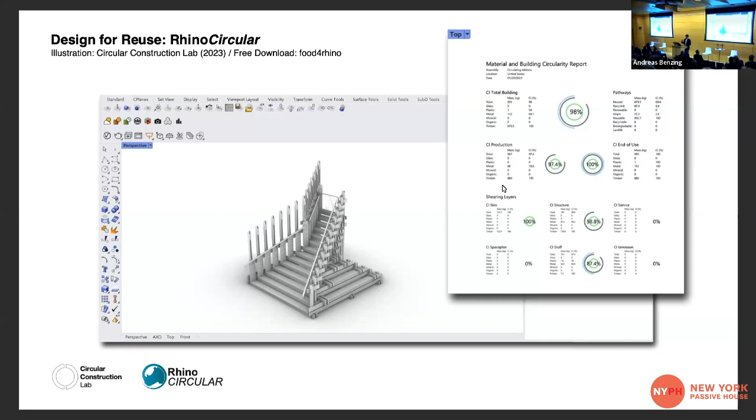It links our construction archetype library with specific geometric information, and it constantly updates. So if you make a design change, or change the material link, you always have immediate feedback on the circularity of your design. And you see that basically in your drawing environment. It's omnipresent - if you want, you can of course turn it off, but it's there if you want it.

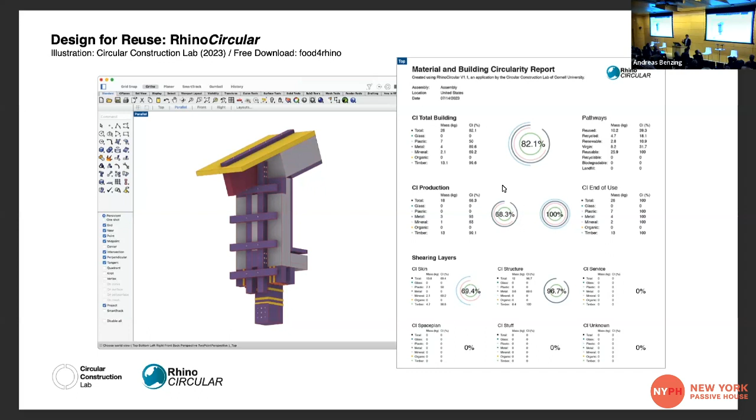We're pushing on Monday a new version to food4rhino that now also allows you to visualize circularity in the geometry. So your geometry itself gets color-coded by the circularity indicators, and you can of course decide on your own color scheme. In this case, the magenta parts are really high in circularity and the yellow ones are problematic. So it's not just an abstract number anymore where you say somewhere in your skin you have a problem - you now see, hey, this piece has a low circularity rating, and you can go in and say, let's change that, let's change the design of that.

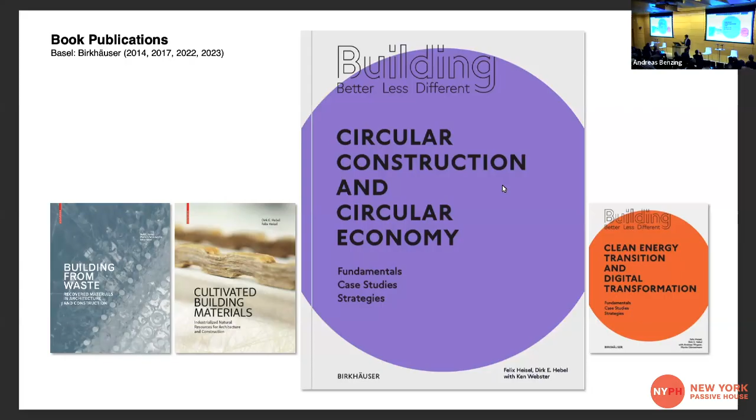If you need any more information, I'm happy to take questions. But as mentioned by Andreas, we've had a couple of publications in the past. The most recent one out is Building Better, Less Different: Circular Construction and Circular Economy. That book is part of a series, and the next one is coming out in October, next month, with the theme Clean Energy Transition and Digital Transformation. So this is a little outlook to that.